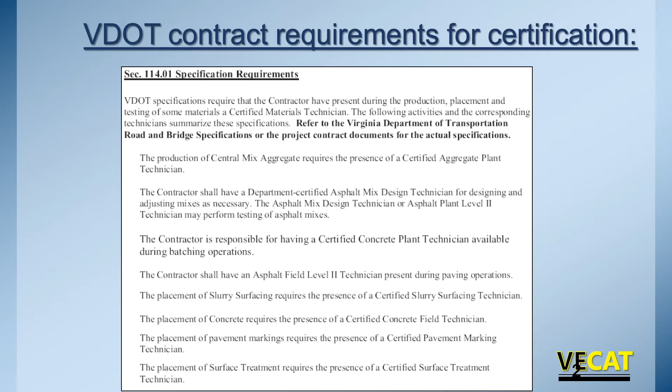So to do that, we go through. If you look in your spec book, there's a whole list of different requirements, different technicians that'll be required. This table will be added or updated in the spec book through probably a special provision or a supplemental spec that will add the cold asphalt recycling field requirement.

For a lot of our classes and a lot of our credentials, in the manual of instructions, we lay out what's the certification title, what school do they attend, and then if there's a proficiency requirement. For the cold asphalt field certification, there is no proficiency associated with it, so it's much like the asphalt field level 2. Once you go through the class, you take the written exam. If you pass the exam, you'll become credentialed.

So let's talk about the projects overall. Let's talk about communication. How do we communicate what is to be done on a job? Well, through that communication, we have various documents that are vital to the organization, and a lot of these are laid out in specs and contract plans and special provisions. All this goes together to make up the contract that you're going to be doing. So whether it's plans all the way to special provision copied note, these all tell the contractor what to build and the inspector what to inspect.

So let's look a little bit more at the documents that may be part of your project. VDOT has standard drawings. So if you go onto the VDOT website and you go looking, you can find standard drawings for almost anything, whether it's paving, putting in a curb and gutter, putting in a light pole. There's standard drawings that are to apply across the state.

Then we have standard specifications. This is your spec book. So if we look back, here's our spec book for 2016. We have multiple years of spec books going back. Whatever the current year is, the spec book that we're following, those again, standard specs are to apply across the state, but they don't apply in every situation.

We have supplemental specifications. What are they? Those are when we look at our standard specifications and note that there needs to be some changes made. Either we need to amend something or we need to delete. So they are covered in our supplemental specifications.

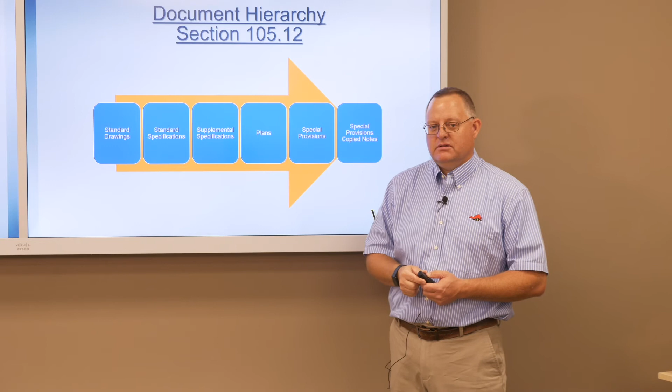And then we have special provision copied notes. So with those copied notes, they may override something in a special provision. So while this special provision for cold in place may exist, there may be something unique to that project or to that area where a copied note has been added that overrides the special provision.

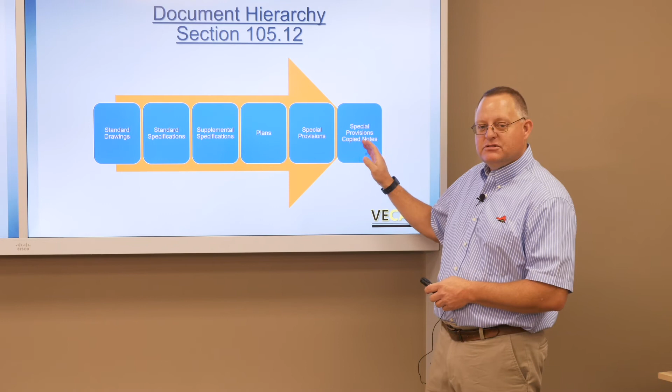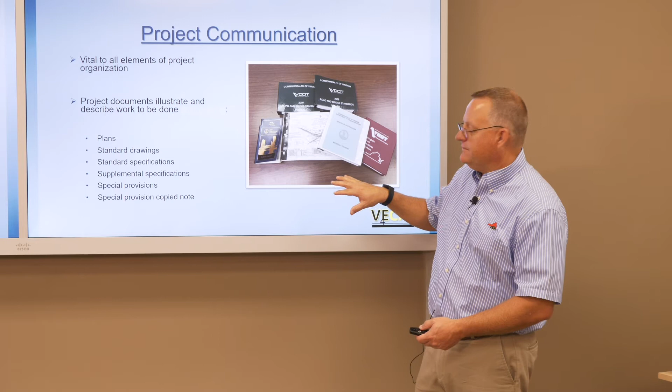The thing to keep in mind is the copied notes are the highest level in this hierarchy. The standard drawings are the lowest. So as you look through your contract documents and you look through all this material, you need to make sure in your contract what exists. Special provision copied note supersedes, special provision supersedes all the way back. So make sure you understand how the project's to be built through all these.

Well, sometimes there's some concerns, confusion, or some clarification needs to be made. And another type of communication beyond your contract documents is actually sitting down and meeting face to face. So we have pre-construction conference. So before a project begins, we get everybody in a room, we get all the VDOT players, the consultants that may be doing the inspection, the contractor, maybe some subcontractors, and lay out how the project's going to be built, answer any questions, get any clarification. Maybe there's some other ideas that the contractor may have to present. We lay it out in the pre-construction conference.

Depending on the life of the project and the nature of the project, we may have formal meetings throughout this process. These could be laid out actually in the contract documents themselves, how often to meet. Throughout the whole time, we're going to have a lot of informal meetings out on the site, back in an office, over the phone. So we've got a lot of informal meetings and information sharing.

The one thing I would recommend highly is written communication. So if a decision has been made, guidance has been given, make sure you document it and make sure everybody knows this is what was discussed, this is what was decided, am I correct? And then get everybody to agree that yes, this is the way we're going to move forward, because if it's a long duration project, personnel may change, the project complexity, new situations. You want to have something written that said, this is how we're going to handle this instance. So good best practice is to actually write it down.

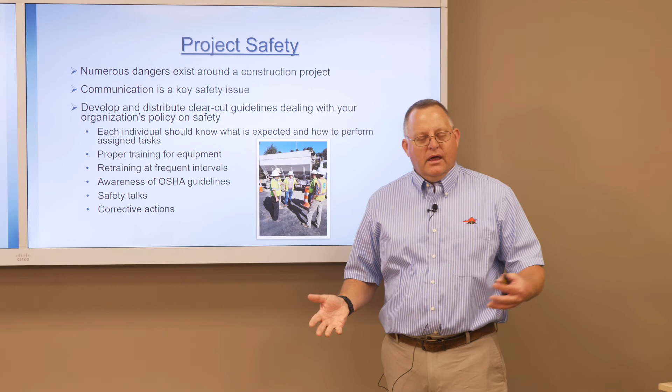Another thing with the communication is safety. We want to make sure all those that come to work go home the same way they came in. So we want to make sure everything's safe, because there's a lot of dangers on these construction projects. Projects with the cold asphalt recycling, whether it's cold in place or paving with the central cold plant material, it's just like an asphalt paving job. We're either producing the material on site or we're hauling the material to the site. So a lot of times we're next to live traffic.

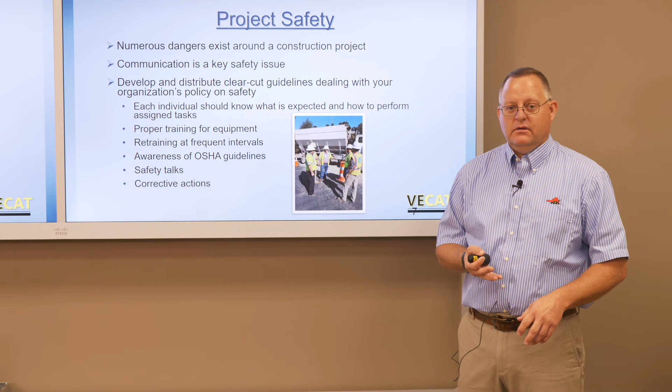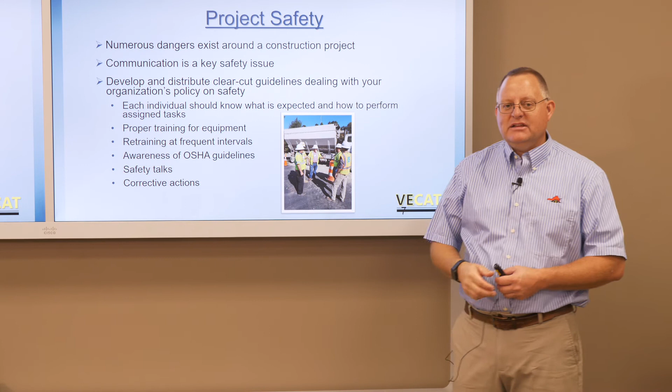We've got pavers involved. We've got rollers involved. We could have distributors involved. We've got traffic next to us. We've got dump trucks. Lots of things are going on, so there's a lot of dangers. So we need to make sure communication is there to keep everybody safe, that you're looking out not only for yourself, but for those around you.

We want to make sure that there's good guidelines in place, how safety is going to be handled, who's responsible for it. Each company has developed, and they'll distribute, very clear-cut safety policies. They want to make sure that everybody's on their project, whether they're an employee or a consultant or a VDOT or sometimes even public that shows up. We have a way to handle them, make sure everyone's safe. Everybody needs to know what they're doing, how to do it, perform it safely. They've been properly trained.

Retraining: a lot of company policies will lay out how frequent retraining is done. A lot of these are on safety, whether it's using personal protective equipment or running the equipment itself. They're aware of OSHA guidelines, what's required, reporting. Safety talks could be weekly, could be done every day. It depends on the company and how they've set it up.

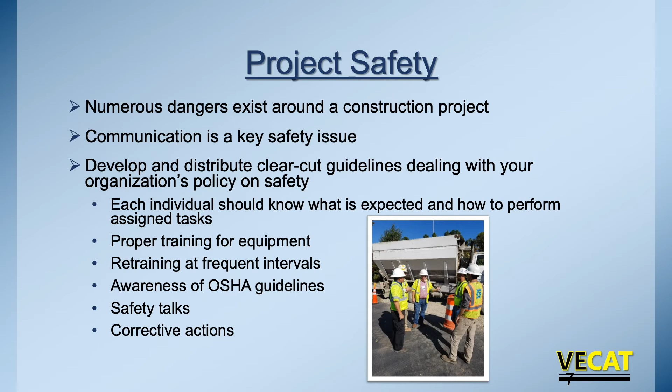And they want to make sure that if anything's noted, corrective actions are taken. Again, these are unique to each company. Overall, they're very much the same, but they want to make sure everybody's safe. So let's talk about cold asphalt recycling. What is it, and where should we be using it?

Well, if we look in the Manual of Inspections, and that's what MOI stands for, on page 85 of Chapter VI, we see the definition of what cold asphalt recycling is. One, it could be the cold in place recycling train. As you're going down the road, you're pulverizing the existing pavement to a specific depth, you're putting in a stabilizing agent, and you're paving it. So it's going back either directly into a paver, into a screed to be spread out, or it could be windrowed and then put into a paver itself.

The second process is paving just like we would with hot mix asphalt, our conventional asphalt concrete, where we're taking a material that's produced at an off-site plant, or even on the project site, but not right where the work's being done. We're producing the material, and we're coming back and using conventional paving equipment and conventional compacting processes. So 2 different processes, both being done in the field.

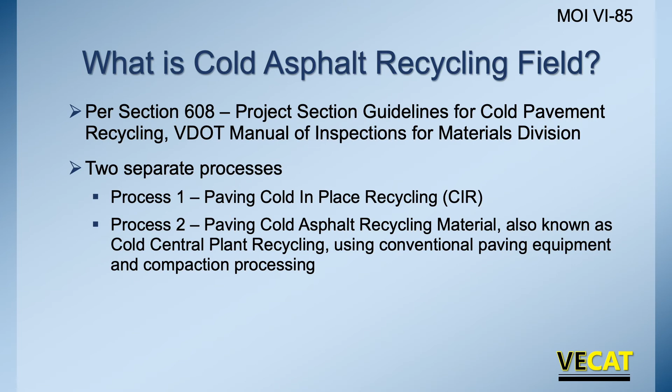So let's look at cold in place. As we look on page 85 in our manual, here's a good diagram. On the right, you can see the existing pavement. You can see the housing of that cold in place equipment, which is typically a type of modified milling machine. Here we're doing full width, milling down to a depth. We're pulverizing, we're mixing in a stabilizing agent, which is either emulsified asphalt or foamed asphalt, and we can windrow it right behind the equipment.

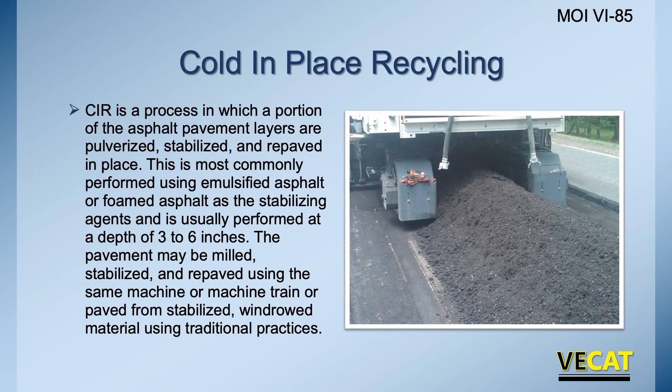And then we also have the opportunity to pick this up and put it in a paver, or some of the cold in place equipment actually has a paver screed attached to distribute the material, and we'll show some pictures. We're usually going down to a depth of 3 to 6 inches, so this isn't a replacement for a 2-inch mill and fill, nor is this a replacement for full depth reclamation, because we're working in a pretty narrow band of 3 to 6 inches in depth, where we're removing distressed material, stabilizing, and putting it back in place.

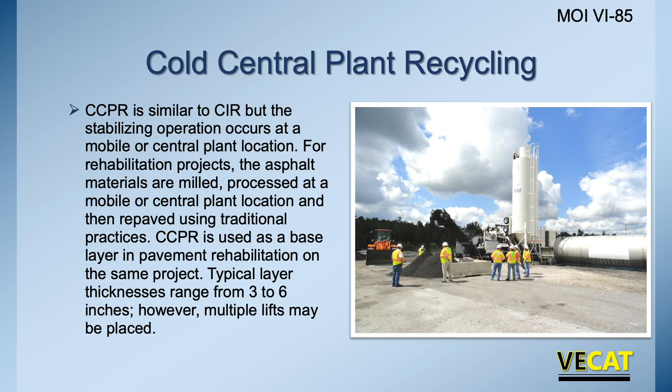This is what a cold central plant recycling facility may look like. There's different manufacturers. This is a working facility. Here you can see a horizontal asphalt tank, a cement silo, and all the equipment in the back to produce the material. So the millings go in, they're screened, some moisture is added. In this one they add foamed asphalt binder, they mix it in a pug mill, and it's coming off a conveyor. Again, here we're doing 3 to 6 inch layer thicknesses. This is being treated like an asphalt-based material. It's not a surfacing material, and it can have multiple lifts placed on top of it.

But here we can be doing this as part of a pavement rehab. So we're milling the material, taking it away, and bringing new material back. It can be one and the same, or on a stationary site where a contractor already has a milling pile, they can be producing the material coming right back, and the millings can go to the milling pile that could be used on this project or future projects.

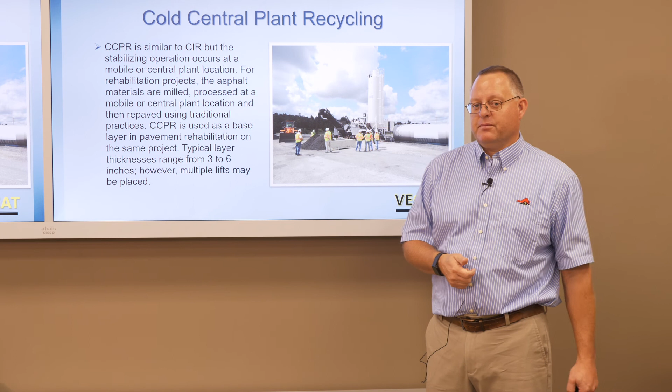So where should we be using it? Well, it depends on the process. So what are we trying to do? Is this part of a new construction job, where CCPR can really be used on new construction, whether it's a road or a parking lot?

Cold in place, we're doing it on an existing facility where we need some restorative or reconstruction work, where we see the distresses in usually about the upper 6 inches of the pavement. So we may not have a sub-base issue, we may not have a subgrade issue, but all the distress is in the upper layers of the pavement. We're looking at 5 lane miles in length, because of the mobilization of this equipment to get it on site to do the work, just from a cost effectiveness standpoint.

And again, it's where we're doing a lot of patching. So we can see over time, we've got recurrent patching as necessary, and that really falls back into we're doing restorative maintenance or reconstruction.

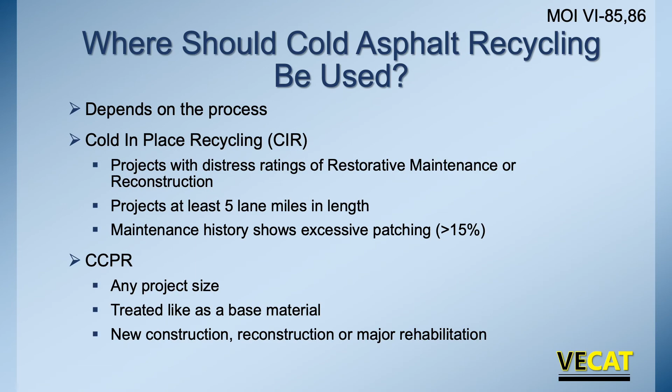With the CCPR process, that cold central plant, the stuff that we're bringing out of this drum or outside of this plant, we're producing this base material for basically any project size. So if a facility is already set up, we can be shipping it out to one to multiple sites. So various project sizes. We treat it like a base asphalt material.

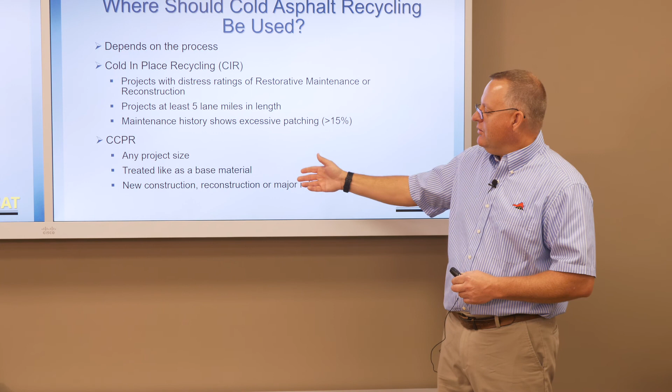So we are going to cover it up. There will be asphalt placed on top of it. It could be surface treatment. It could be a thin lay. But at new construction, reconstruction, or major rehab. And in Virginia, we've done all 3.

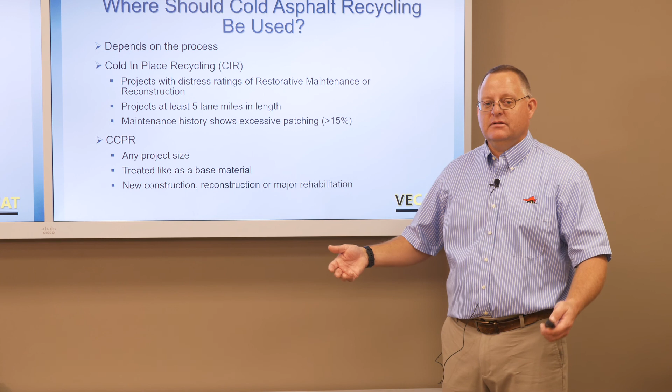So we've used it in multiple scenarios, either as part of a new construction, or we're reconstructing an existing, or as part of a major rehabilitation. So this material is very, very flexible in terms of where we use it.

Well, how do we know what we should be doing? Again, in the manual instructions, we look at the existing pavements, because we're trying to see what's the nature of the distress, how's it coming about. So we're looking at the visual condition, what type of cracking, rutting exists. We're doing structural testing, and here's a diagram of a falling weight deflectometer, but there's multiple ways to do structural testing. We're doing some coring and borings.

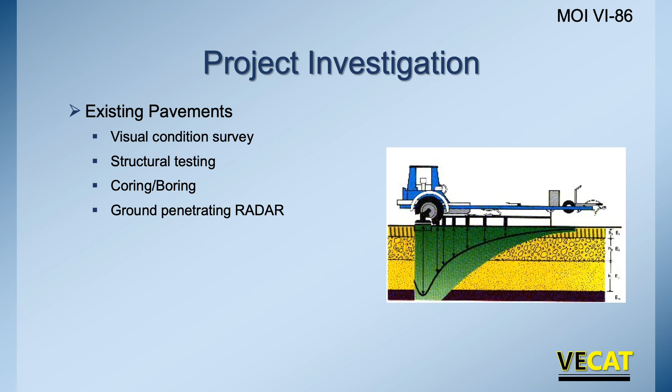We want to see how deep that distress is. If it goes all the way through that entire pavement structure, these processes aren't really relevant. We need to be looking at doing full depth reclamation if it's an existing road. So if we're on an existing pavement and we see distress is 10, 12 inches deep, then we need to be looking to do something different. And we're using ground penetrating radar to really do an assessment of what's the condition of the overall bound pavement structure.

So whether you're doing cold in place recycling or cold plant recycling, the final surface really depends on multiple things. It's generally one or more lifts of asphalt concrete. If you look in the manual instructions on page 88 of chapter 6, it gives you more details. On some low volume roads, that may be a surface treatment or a slurry surfacing.

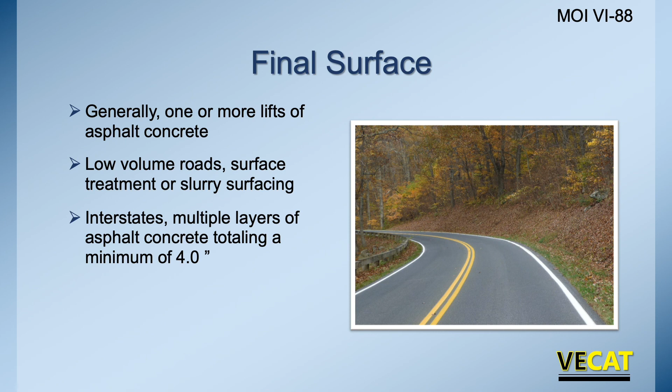But as you get on interstates or roads that have higher traffic levels, the minimum asphalt thickness is 4 inches. So that can be either cold in place recycling, cold plant recycling, CCPR, or if we're even doing FDR, which is another cold recycling process, it requires 4 inches.

So to summarize, as we get into this class, this cold asphalt recycling field certification is now part of VDOT spec requirements. So if you're out on a job, either as the contractor that's doing the acceptance testing, overseeing the paving operations, or if you're the inspector, you need to be certified. Special provisions and special provision copied notes are going to be in your contracts, and they're the highest level of enforcement. So be aware of what those are.

We start projects with a pre-construction, but we do lots of other informal meetings throughout the project. But make sure you document any decisions or direction made. Cold in place, we're doing roads that have failures within 6 inches of the surface. So that's why we need to do some coring and borings to see where that failure actually exists, what's the cause of it. Cold plant, or the central cold plant recycling, is the base material, so we can use it in multiple projects, either new construction, reconstruction, or part of rehab.

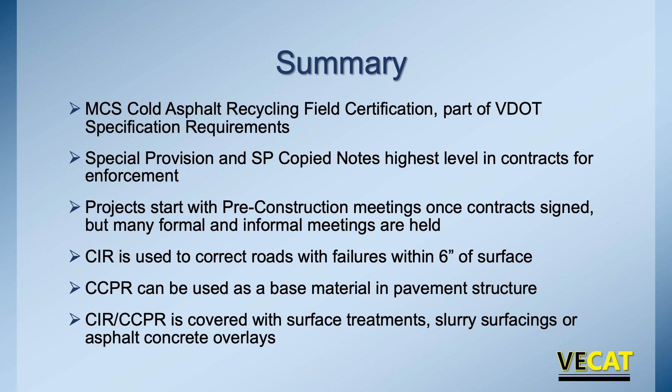And we can cover these with any of a number of our traditional materials, whether it's surface treatments, slurry surfacings, or asphalt concrete overlays. So I hope that gives you an overall feel of what the cold asphalt recycling process is on the field side. As we go through the rest of the modules, we'll get into how they're performed as well as how they're accepted.